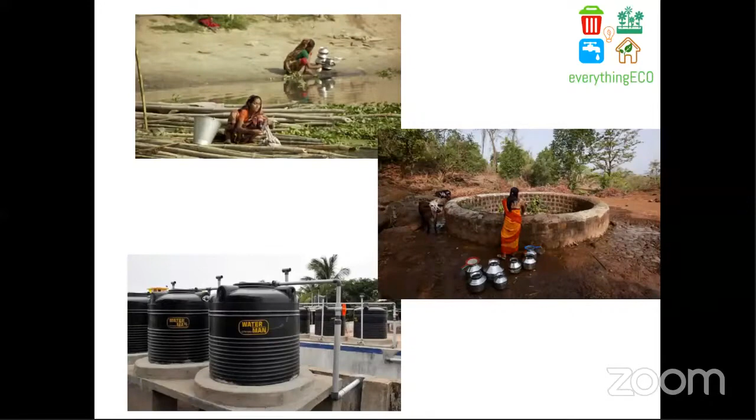So this is a very classic picture I share in all my presentations. The two pictures that you see here are 300 meters apart, taken in Bangalore, in HSR Layout. A person washing cars, streets, everything uses a pipe hose with a 36 liters a minute flow, and does this every day for at least half an hour to an hour.

And the kid on the right side takes a small bucket of water, two of these, carries them up 5 floors, and that family lives on it for an entire day. So you can see the contrast, how much water we use on a lot of activities versus people who are living on just a minute of water that's wasted out there in the street. So knowing your footprint is very, very important, as you can understand from this picture.

And of course, we have seen a lot of times, this is a crisis every year come May. This year also we would hit it, but I think because of Corona, this news is not making it to the top of the list. But most years we see this by May and June all over Bangalore, Karnataka and all over the country. And I would also say that because of the COVID impact, people are using a lot of water now, right? We have to wash our hands and everything, so we have to be more conscious about how we consume our water.

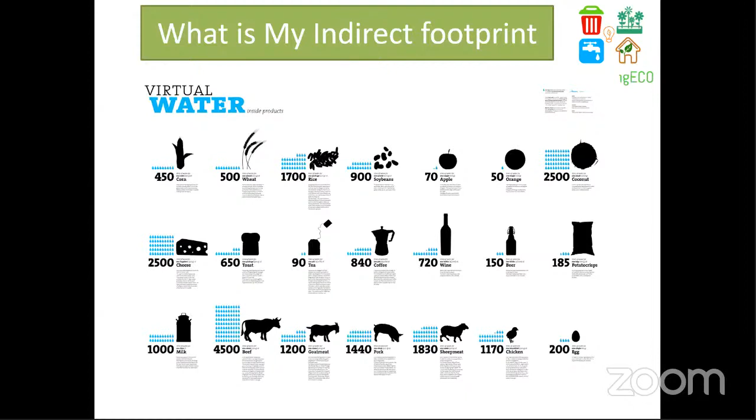So let me go into interventions. We spoke about what you can do, and I'll quickly go through these aerators that I was talking about.

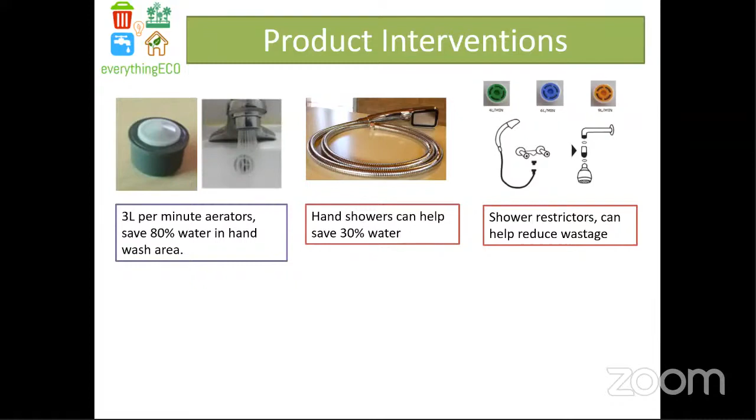Typical taps in the market come at 12 to 26 liters a minute. When people say eco-friendly, it's usually 12 to 16 liters that we've measured. If there's no filter, it goes up to 26 liters a minute. So putting any restrictor or aerator will always help.

Of course, the bucket is the best. As I said, 16 liters is the total water in a bucket, and you can use that to save a lot of water. The quick mop, which I mentioned earlier, is similar to what I'm showing here, available in the market. The plus point is you can use one-time, half this bucket, and mop pretty much the entire house of 2,000 square footage. So you save a lot of water with that.

And if you don't use chemicals in your mopping, you can reuse that water for your plants too. If you use bio cleaners, you can use it for other purposes.

Let me come back to one more thing we've considered: rainwater harvesting. Bangalore is blessed with very good rains during multiple months, and we've studied this. We get close to 877 mm of rain in a year. We've been looking at every single customer, client, and individual to tell them that the most important thing we should do is save this water, not just recharge it into the water wells inside.

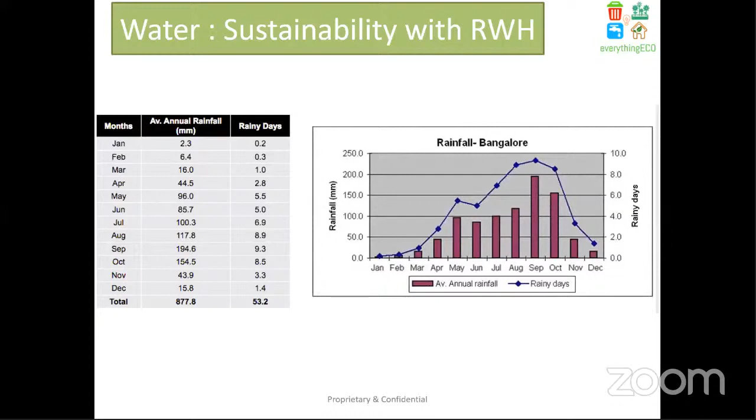Because when we save it, it's the purest form of water we get. If you put filters, you can filter out dust and dirt particles, and then save that water. In fact, many people we've seen in Bangalore, after filtration through a basic set of carbon filters, can actually consume this water. It's as pure as that.

When we were looking at this, some hotels, like in Whitefield, we worked with them to get rainwater harvesting on their terrace. So they save almost 3 tankers a day during these rainy seasons.

Just to give an example: 89,200 liters for a 10,000 square footage roof space, at 100 mm of rain. We get 859 mm of rain in Bangalore, so you're talking about 766,228 liters per year. That's the amount of water they're getting.

So most of us have to look at how our pipelines are from the terrace and retrofit the same using some rain filters. Then you filter that water, and you can purchase any number of storage drums. After storing, the overflow of that drum should go into your rainwater pit. This helps in terms of storing this water, filtering it, and you can also put it back into your sump where you consume it.

These are other ideas if we don't want a large retrofit investment to rechange the plumbing. The easier way is commercially available drums that are low cost, which you can procure and easily install in any driveway or pathway to store water. I think these have helped a lot of communities use this water for gardening, car wash, mopping, and other secondary purposes. In fact, some of them, as I mentioned, use it even for drinking.

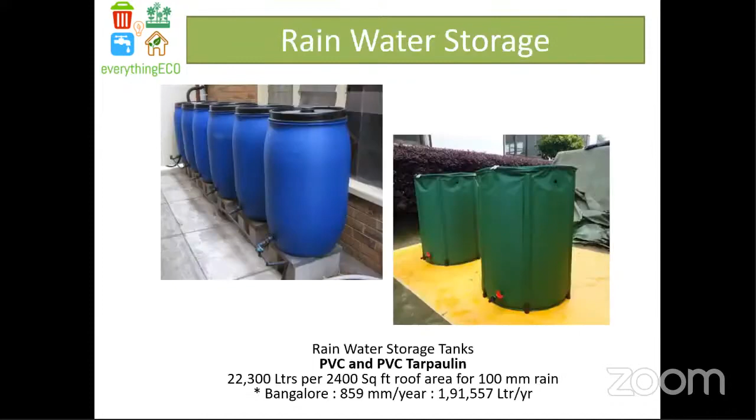Another thing we noticed is there are 3 parts in a water life cycle. One is your consumption, which we touched upon earlier, how we want to reduce it. The second is retaining the water that's coming from the sky, rainwater. And the third is reuse of the water.

Sewage treatment plants are a very critical part. Many apartments have them, but there's been a lot of mandate to fix them from the government. So what we've seen is there are fundamental problems with some of the sewage treatments, like how aeration works and then converts the water into good water from gray water.

We have seen one technology, MBBR, which we've recommended to some people, and I recommend to all of you to explore. When the sewage water, at least secondary water like showers and kitchen, is put under MBBR media, it helps develop bacteria on that media that eliminates all the odor as well as bad components of the sewage line, and provides a fairly good amount of water that can be used for secondary purposes.

A lot of apartments have adopted this now, and the water can be made almost potable quality for secondary purposes like car wash, from the sewage lines. In fact, there are a few communities in Bangalore that have put a full-fledged RO filtration for sewage lines, and connect it back to the drinking water too. We've seen that also happening in Bangalore.

So 3 levels: first, reduce your footprint by eliminating wastage wherever possible. Second, store the water from rainwater as much as possible, and recharge the rainwater pits, because we've seen that when water goes into the earth, it's not percolated right away. About 80% of the water just gets wasted, so storing is the best method before we let it percolate into the earth. And third is reuse of the sewage lines—if not from the toilets, then at least kitchen and secondary waters, we can reuse them.

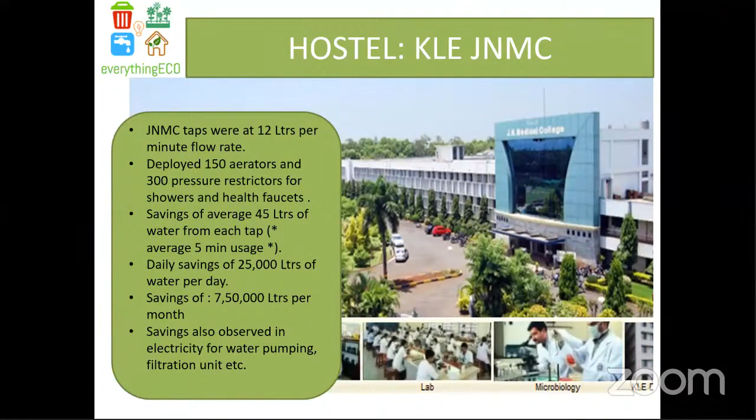Apartments, again, major apartments consume a lot of water. We have worked with one small apartment, Srinilaya, with just 70 plus apartments, and we have been able to help them save 28 tankers a month.

The best part is that most of the implementations, whether restrictors, aerators, or rainwater harvesting, they recover all of the money within 2 to 3 months. These are the best investments that every one of us can do, where it saves money plus it's also wonderful for the environment.

We also worked at office buildings, a lot of office buildings we have worked with, including HP and others, and Capgemini and others. We have actually helped them save 3 lakh liters per month in those offices. Although the consumption in most of the office buildings is mostly cafeteria or bathrooms, depending on number of employees, the consumption can go up.

Hospitals, we're proud to say that we have worked with all leading hospitals in the country, Narayana Hrudayalaya, Apollo, Fortis, every one of the divisions.

So the way I look at it is, water is something that's only known after the bill, end of the month, your invoice or bill comes, and people used to look at it and say, oh my goodness, this much water or this much bill. But still, the price that we pay is not the reason we should save, because in many residential cases, the price on a monthly bill is 400, 500 rupees, and it's not significant for most. But the amount of water that's spent for that is a significant amount.

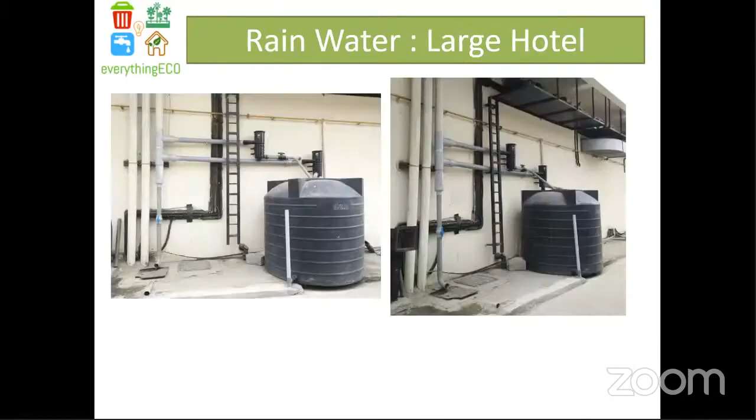I think this is a very wonderful study that you have done, and from my experience, I still keep having discussions with people who feel that a shower in the bathroom uses less water than a bucket. So that's something we still have to demonstrate, and make people realize that a bucket bath is certainly far more water saving than a shower bath.

Absolutely. The key here I want to mention: with showers, we feel the water flow is very controlled, but it averages out over a period of time, depending on the person and the usage pattern. A lot of people run the shower for the entire duration, and at a very high mode. And we don't have control over the types of showers people are using.

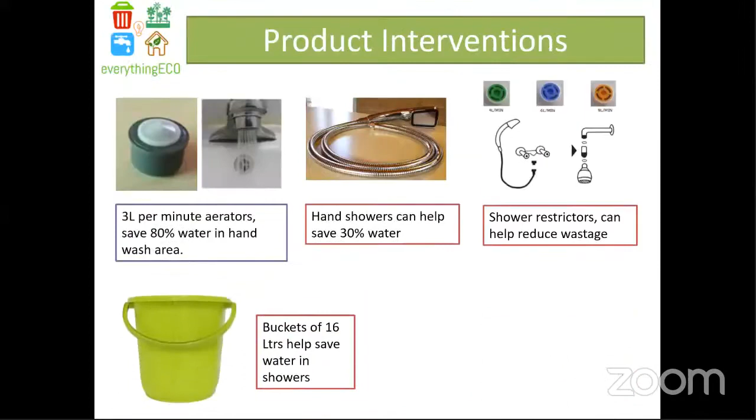The one thing that we are trying to address is not just recharging. We are talking about store and recharge. So here, as you can see, what we have recommended or implemented is level 1, step 1: store as much water as possible and start using it right away. Because when we do a recharge, of course we are recharging the well, but the percolation pits sometimes have overflowing capacity, right?

Because we have seen in Bangalore, in many places, the rain completely fills the entire recharge pit in 10 minutes. So when it's raining for 3 hours, all of the water just goes into the gutters. So what we have seen is we have to recharge, there's no doubt about it, but introduce one level before where we can start saving that water instead of just recharging.

And if you just recharge, you are putting it back into the borewell, but you're pulling the water out again and using electricity, carbon footprint, everything. So my point was that we store, we use it right away, plus excess water goes into the recharge pit.

And believe me, this kind of a drum here, this is a Fortune Hotel where we have implemented it in Whitefield. This gets filled up in like 20-25 minutes of rain. And after that, excess water automatically goes into the recharge pits. So there's a lot of water that we can store from rainwater.

There is also a very good suggestion that if the roadside drainage system has underground water recharge every 100 meters, that will improve the underground water level. Absolutely, I think that is one wonderful aspect. Many people have recommended that in the drainage system you can put 6 rings, fill them with carbon and sand, do basic filtration and start recharging in the whole community. So that will help us.

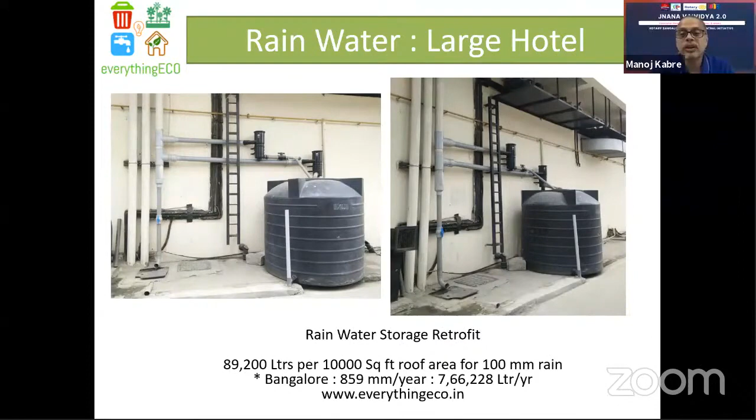Great. Can you elaborate on MBBR for STP and how costly is it for an apartment complex? Yeah, good point. So basically, your STP plants have a 4-tank system or 3-tank system. The most important part of your STP is where you have aeration, which is the second or the third tank. If that particular tank is not working properly, the entire STP functionality is gone, because the amount of air we put into the sewage water and the bacterial creation are the two major parts of our STP water recycling.

So to ensure that there is enough bacteria that can actually consume the bad particles and convert them into good water, MBBR is an introduction into existing infrastructure. These are mediums called MBBR mediums. They are sterile mediums. When you introduce them into the water, we also recommend putting biocultures. Those two will help develop bacteria within 20 days.

So they're not very expensive. You can retrofit them into any existing plants also. Depending on the plant size and capacity, it can be like 30 to 50,000 or 70,000. But it is a one-time investment, where your plants can actually be converted back into very efficient bacterial growth and cleaner water.

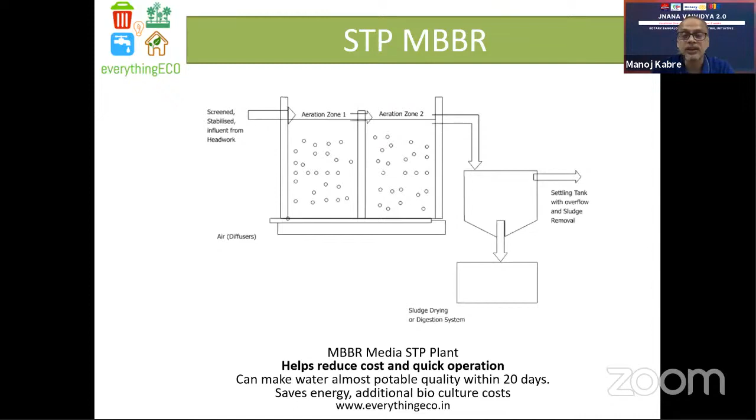Every building should have underground storage and another sump to store used water, getting water cleaned to reuse, as the future war we are going to have is going to be over water. I think that's a wonderful point that Mr. H.G. Parekh has talked about. We all have to be very conscious about water, because as he rightly says, the future war is going to be over water.

And that is the reason I like this term water warrior that we have coined at Rotary, that we have water warriors in all our clubs. We have more than 160 clubs here in Rotary District 3190, and each club has a water warrior who independently takes leadership and works on the goals of water sustainability. Great.